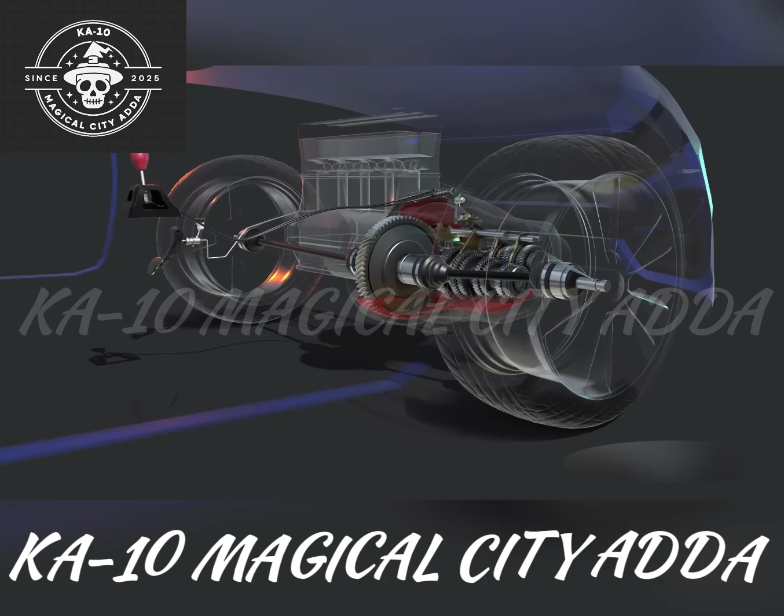Manual transmissions are rare in new consumer cars, but millions of units still exist in older cars, commercial, and racing applications. For this video, we've chosen a front-wheel drive arrangement. Our transmission model is a constant mesh type design where gear sets are always in contact with each other.

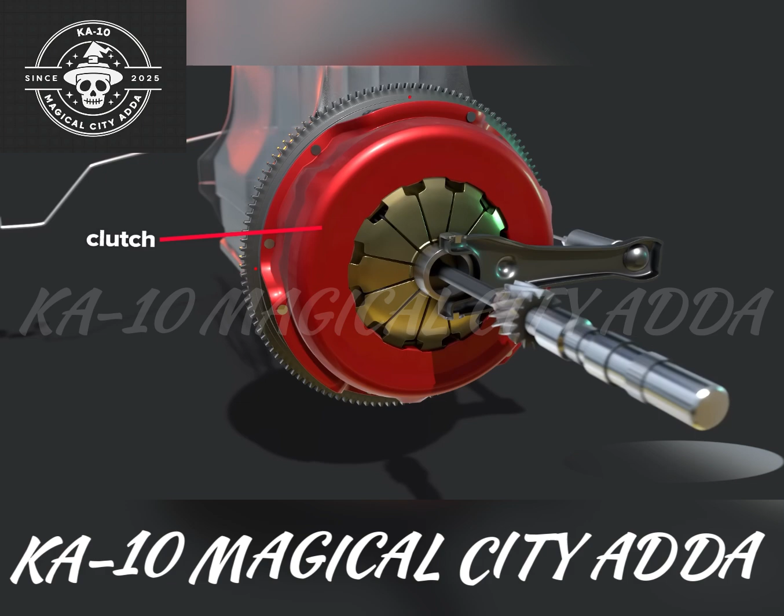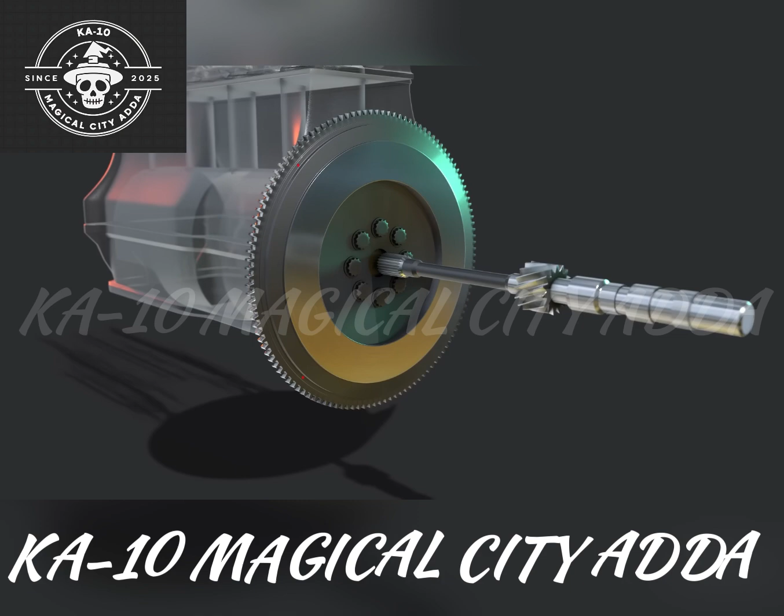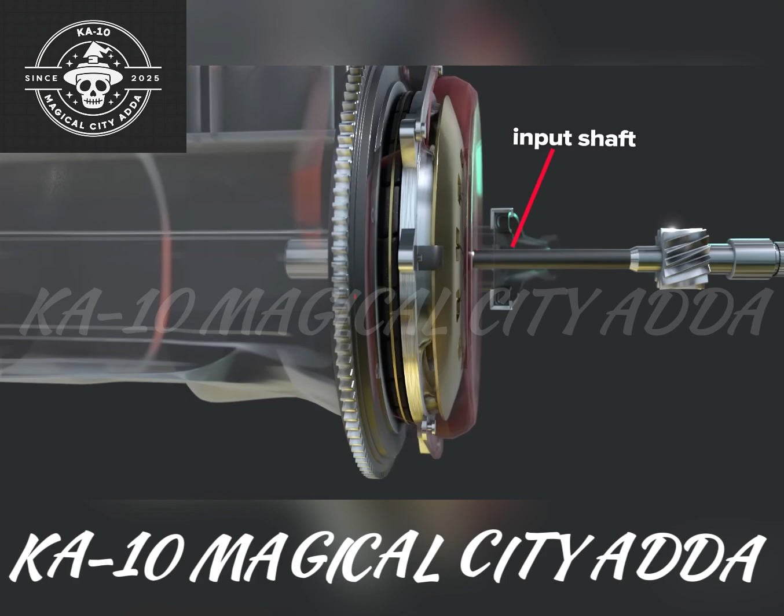Let's start with the clutch. The clutch assembly is securely attached to the flywheel, which is bolted to the engine. It's always spinning if the car is running. The components inside this assembly allow power flow to be disconnected from the transmission input shaft. Note that the transmission input shaft does not itself connect to the engine crankshaft or flywheel.

Connection to engine power is accomplished with a sliding friction disc, sometimes called a clutch plate, sandwiched between the flywheel surface and a movable pressure plate. The clutch plate assembly is splined to the transmission input shaft, but can slide back and forth. The pressure plate gradually squeezes everything together as the driver releases the clutch pedal for a smooth connection to engine power.

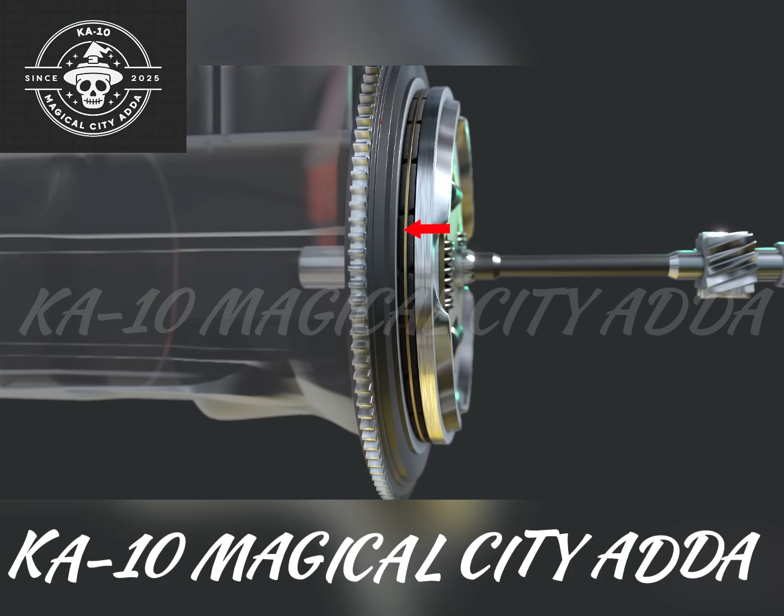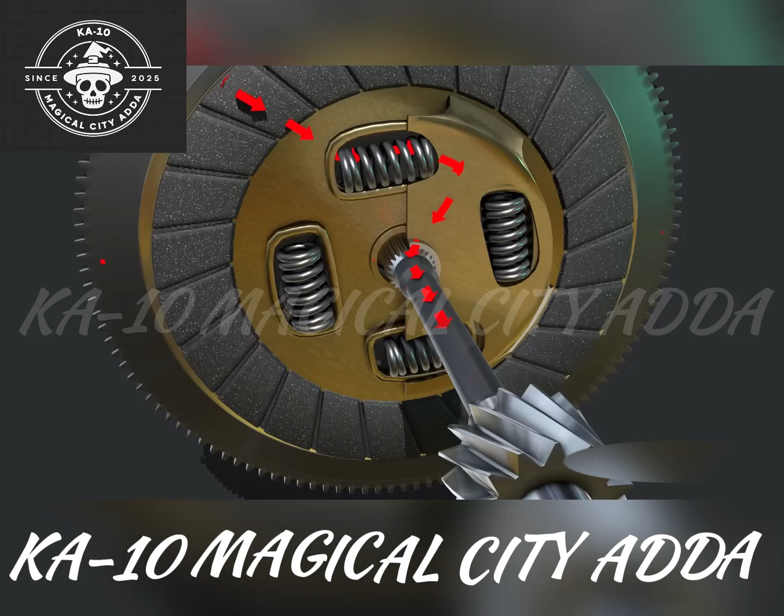To further ensure smooth power delivery, the clutch plate has a built-in damping system. The friction plate floats on the transmission input shaft. Power flows from the disc through damping springs which push against a rotating top plate whose center is splined to the transmission input shaft. The springs continuously absorb vibrations or other potentially harmful anomalies in the flow of power.

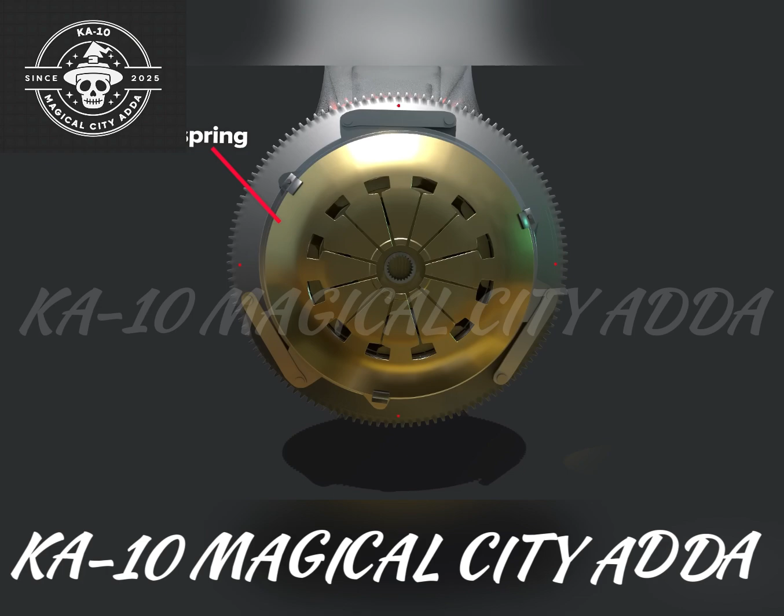Now let's look at how the pressure plate moves. The pressure plate is connected to a special diaphragm spring. This strong spring is what naturally presses the pressure plate to the flywheel. The outer cover has hooks that hold the diaphragm spring securely in place and act as a fulcrum. There are also supporting leaf springs attached to the pressure plate and cover.

The clutch fork sits at the center of the diaphragm spring. As the clutch fork pivots, it presses against a release or throw-out bearing, depressing the diaphragm spring's inner prongs, which in turn lifts its outer edge and the connected pressure plate. Let's see that movement a few more times.

The clutch fork acts as a lever with a fulcrum point on the transmission case interior surface. It's driven by a hydraulic actuator whose lines lead back to the clutch pedal with its own hydraulic actuator and fluid reservoir.

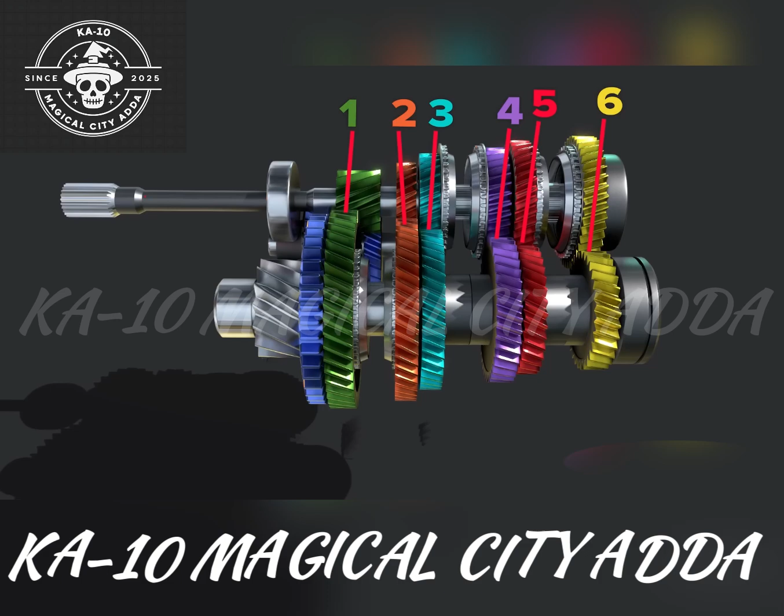The gears. Each speed has a gear set, so that input speed can be different from output speed. The speed gears in this constant mesh transmission are always linked. They have diagonal or helical cut teeth for quieter operation. Notice the reverse gear set with its straight teeth. This transmission will make a familiar gear whining sound when in reverse.

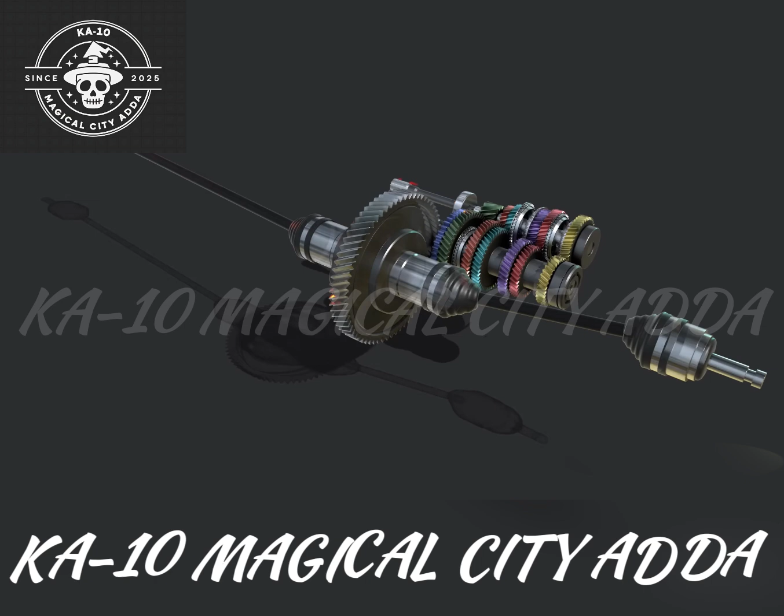Engine power flows through the main shaft, to the counter shaft, to the differential assembly, and out through front axles. Synchronizing gears. To make gear shifting possible, one gear in each set floats freely on its shaft, riding on a roller bearing. The other gear in each set is either connected with splines or directly machined into its respective shaft.

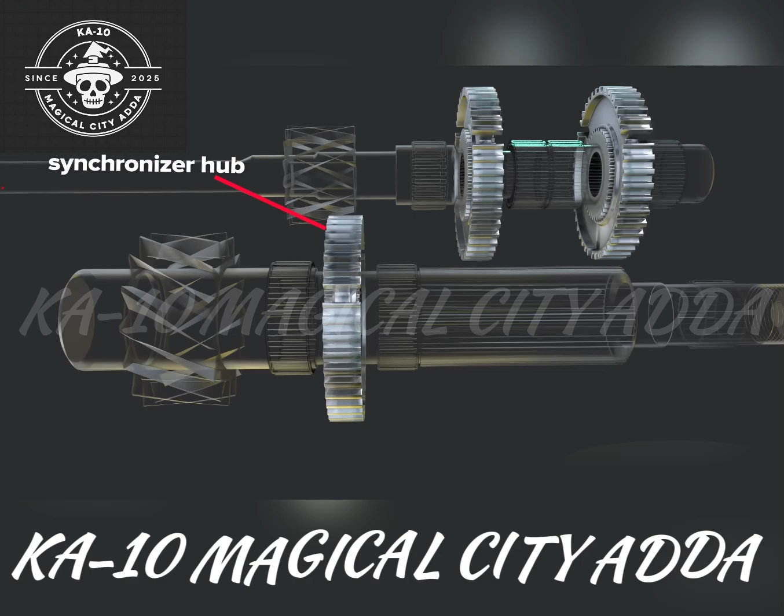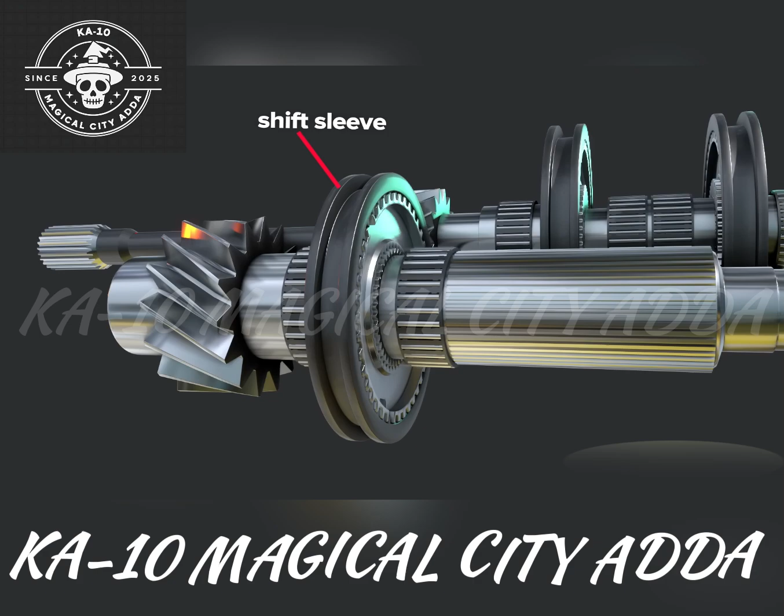For power output, the floating gear in each set must become securely connected to the shaft through the synchronization process. Between each gear set, there's a synchronizer hub that's splined to and rotates with the shaft. A sliding shift sleeve is also driven by this hub, which can be moved back and forth by a selector fork. Forks are connected to sliding rods that are held by the external casing.

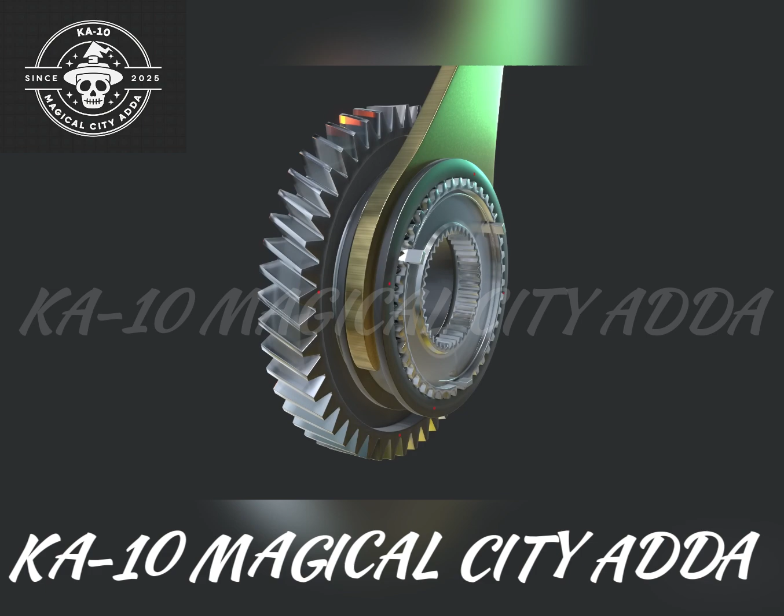During gear selection, the fork moves the sleeve towards the desired gear. A blocker ring sits between the sleeve and the gear. The blocker ring's job is to get everything spinning at the same speed and lined up for a synchronization attempt, or block further movement if synchronization isn't possible for whatever reason. The hub has slots for 3 synchronizer keys that spin the blocker ring, but allow enough play so the blocker ring can adjust on the fly as the sleeve teeth approach.

The shift sleeve's internal teeth are shaped to push against the keys, which in turn press the blocker ring against the gear. The ring's inside surface is conical and has ridges to engage the cone-shaped gear surface like a miniature clutch. Gradually, the gear begins to spin with the blocker ring.

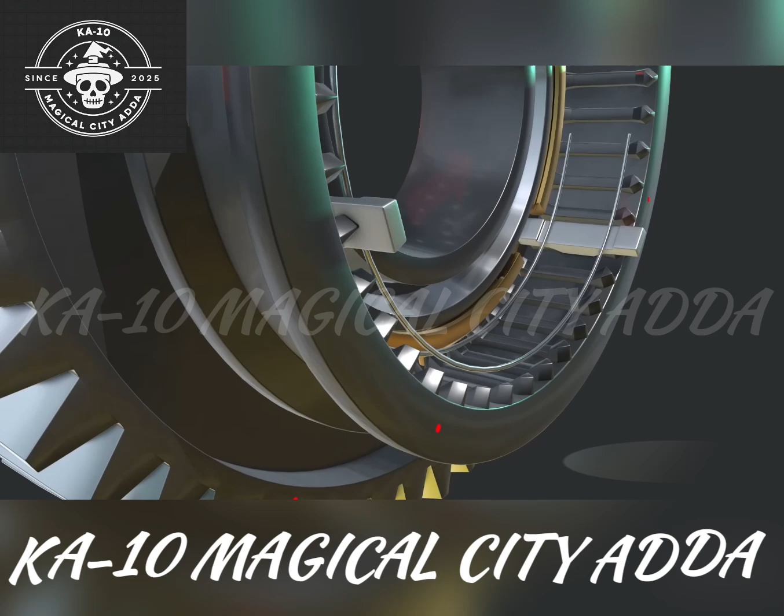The keys are spring-loaded. Once enough pressing force builds, the keys are no longer needed and move down and out of the way, allowing the sleeve to progress into its final synchronized position with gear locking teeth. This process enables fast gear selection between rotating components while keeping main gear teeth safe from the change procedure. Locking teeth on the sleeve and gear are slightly angled in some designs, encouraging a more secure connection.

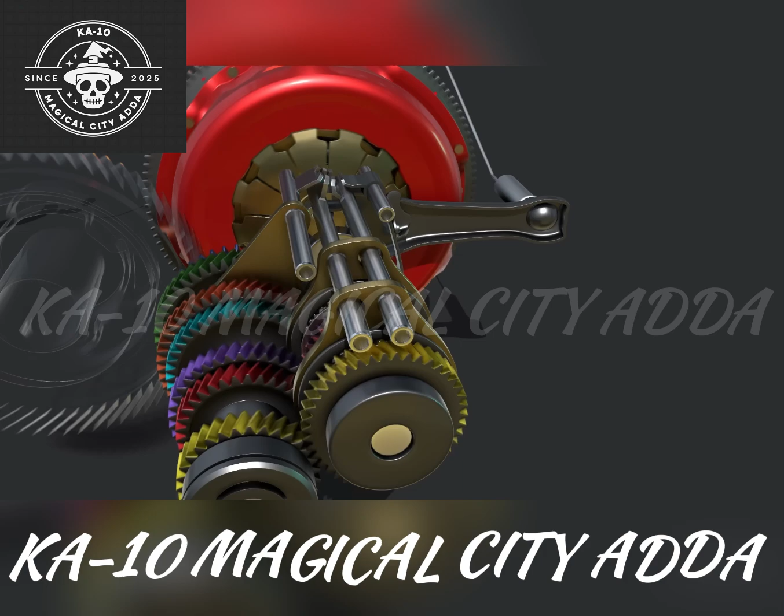Now, power flows through the splined hub and sleeve, through the gear set, and out of the transmission. To switch gears, the clutch is pressed in, pressure is relieved, and the sleeve can slide into synchronization with an adjacent floating gear. Since each sleeve can only slide between adjacent gears, for this 6-speed transmission there are 3 selector forks and rods. The first and second floating gears operate from the output shaft, but this doesn't fundamentally change functionality in any way.

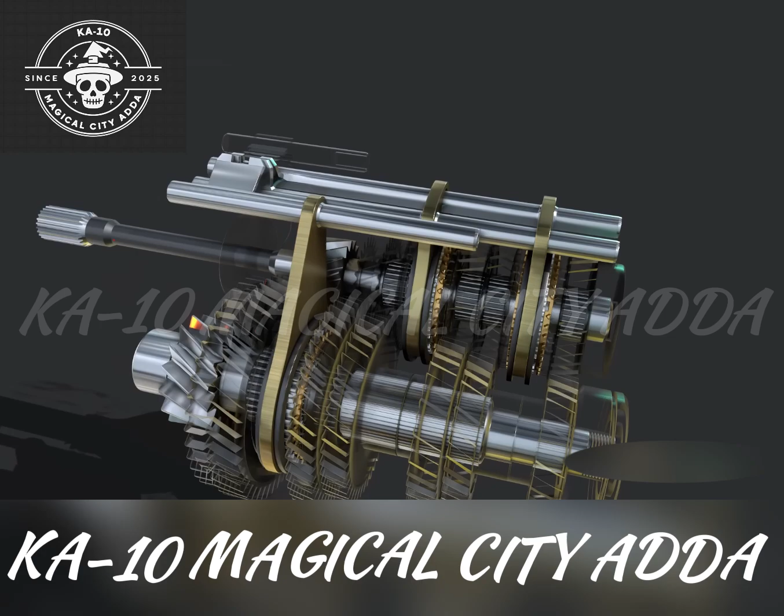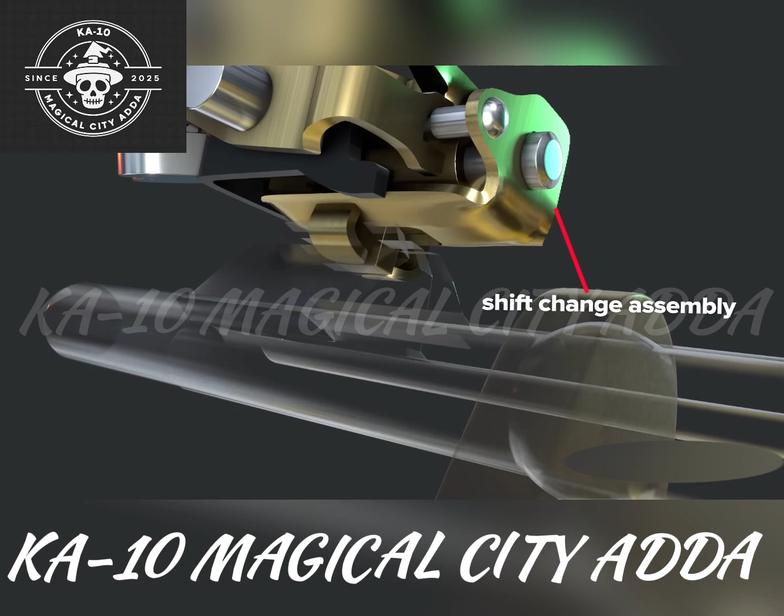Forks and rods only move back and forth, as directed by the shift change assembly. This component can swing side to side to select a specific rod and fork. And once selected, a metal tab pushes the fork one way or the other. Let's trace this component's movement from the shift lever itself. The shift lever rides on a ball that allows movement on 2 axes.

Each movement axis is separated into its own cable. These work something like bicycle brake cables to translate stick movement to the transmission. At the other end, cables are attached to a rod that protrudes out of the transmission case. This rod can move up and down or rotate based on distinct cable input. A specially designed piece at the other end of this rod moves connected components to swing side to side or slide the metal tab back and forth.

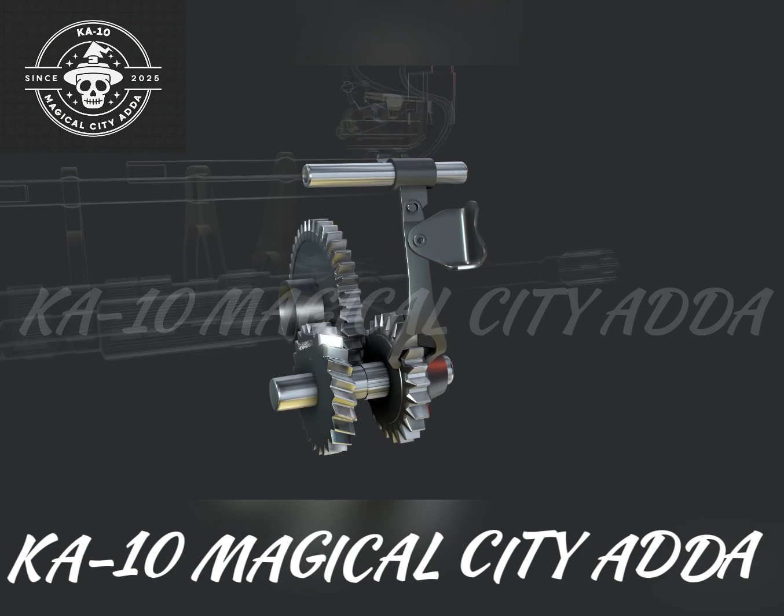Reverse gear. The reverse gear has its own rod and selector fork. The transmission must come to a complete stop to shift into reverse as there are no synchronization components. Adding the third idler gear to the system reverses final output.

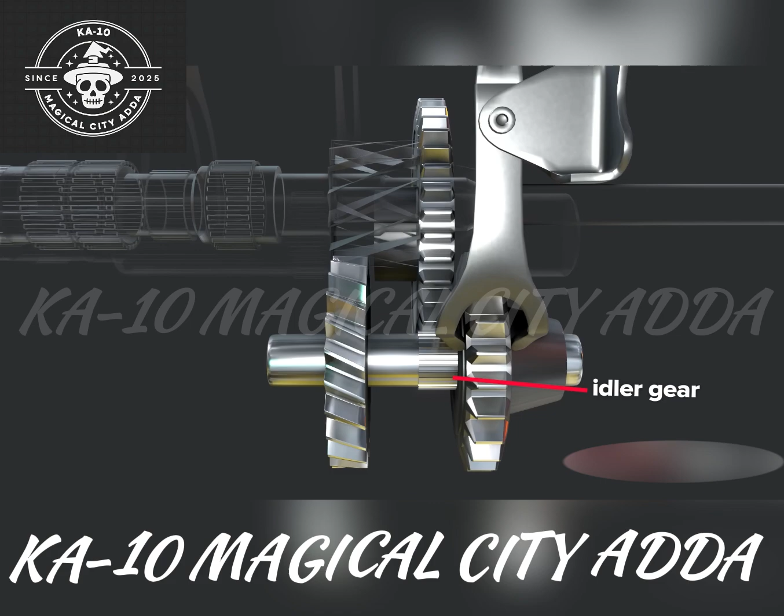Neutral. When in the neutral position with no gears selected and the clutch engaged, meaning the clutch pedal is not pressed in, the transmission input shaft spins, but since no gear is synchronized, no power flows out of the transmission. Oil. Oil rests at the bottom of the case and is splashed up onto gears for lubrication. There's no oil pump or filter.